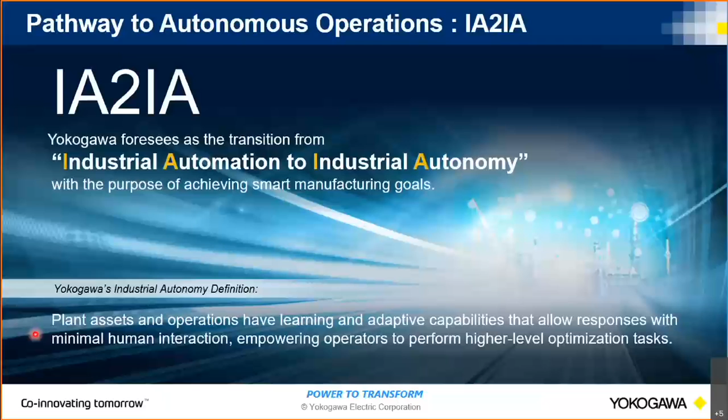As many digital technologies are being developed and released into our market, the process industry is in a big movement from automated operation to autonomous operation.

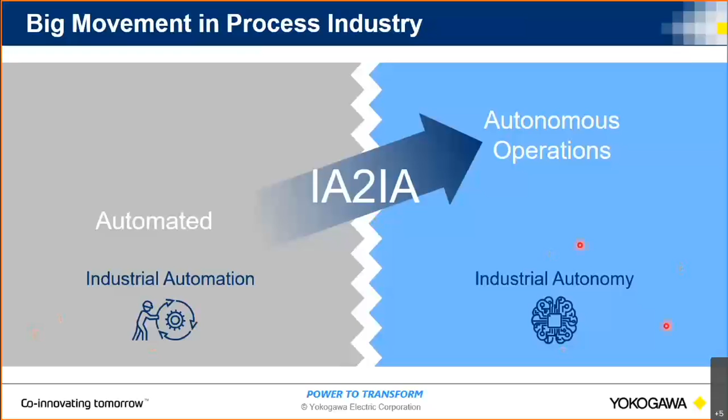Then, what is the difference between automation and autonomy? The picture shows how the automation world is. There are some automated tasks already implemented in your production facility or plant. However, to start or to select what procedures or tasks to be executed over time, the decision is made by human, meaning human intervention between sequences of tasks. So the human starts the automated task. Then once the series of tasks are completed, the human will again come into picture, understand the current situation, then decide the next action.

However, when we transform to the autonomy world, some or all of those decision making currently made by human will be done by the intelligence. That is the difference between automation and autonomy.

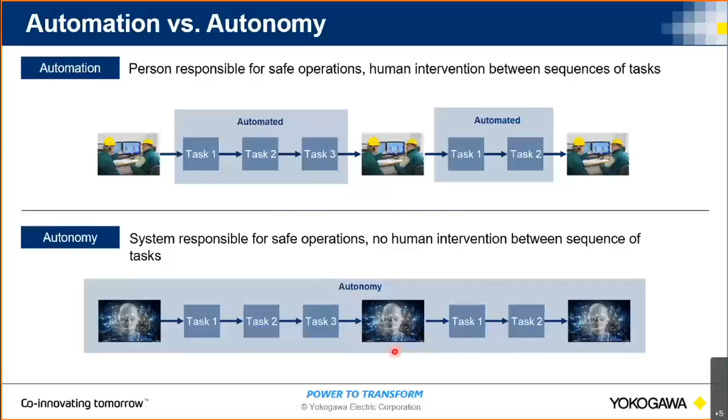And this illustrates Yokogawa today. So Yokogawa has been well known as an automation technology supplier. However, to support our customers' digital transformation better, Yokogawa acquired KBC Advanced Technologies together with Industrial Knowledge and Soteica Visual Mesa in year 2016.

KBC has leading simulation technology for the hydrocarbon industry together with strategic consulting expertise. Industrial Knowledge has secure cloud services which enable supplier and customer secure collaboration. Soteica Visual Mesa has digital energy management and optimization solutions, as well as digital supply chain scheduling and accounting solutions.

By this M&A, Yokogawa's solution portfolio to achieve our customers' digital transformation journey has been extended, and we are continuing to engage with other technology suppliers, for example robotics, etc., to obtain further necessary technologies.

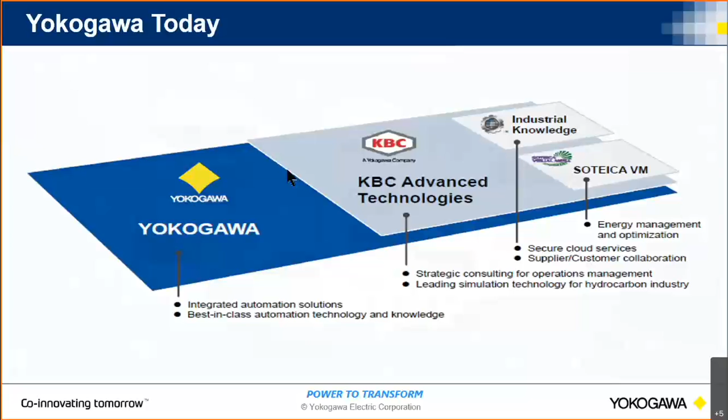In addition to those main drivers, of course, improved human reliability is also key for our industry, because humans are the ones running the plant day by day. In addition to that, the transformation can further address challenges from the changing business environment and optimize the supply chain.

Also, as it is being discussed under SDGs, sustainability and circular economy is getting focused on, not only by industry but also by human ourselves.

Yes, even though there is a driver and a need to bring those digital technologies into our industry, we need to consider new requirements for autonomous operations because we will rely more on those technologies. So higher levels of autonomy need more stringent requirements.

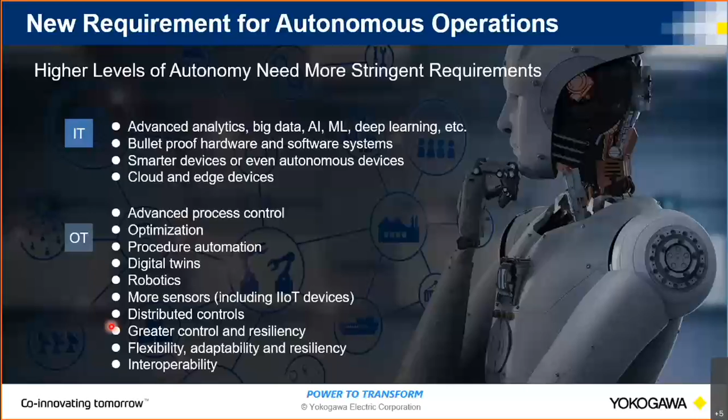We believe the journey doesn't complete by just bringing those digital technologies, but it requires alignment with the company's digital transformation vision and objective. It also requires a change management concept to transform people's mindset, because people are the ones who use those technologies to achieve the transformation.

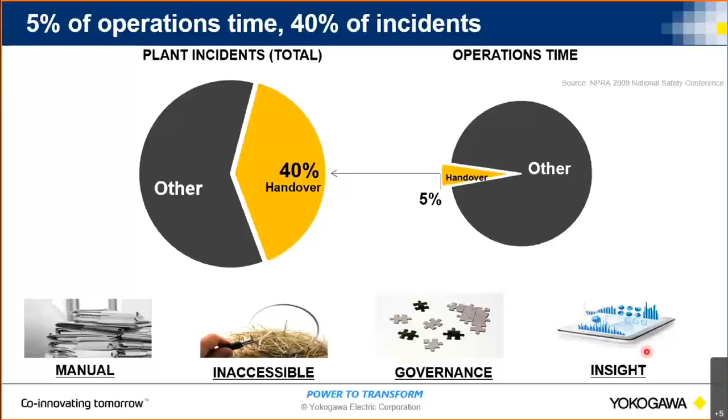That's why we brought this digital shift management solution for your shift groups. When you have a shift team, you have a shift supervisor, operation manager, operator, board operator, field operator. So those multiple roles of people are working in one shift, sharing necessary data at necessary times. However, that data is scattered in many places.

That's why they have challenges having common or correct information at the necessary time. So by digitalizing those shift team activities, we can build a central workplace for the shift team to access whatever data necessary for his operation from this single window. Then, because they are working in a single place, the handover from the outgoing shift team to the incoming shift team will also be smooth, because all the data is integrated into this single place.

And this, of course, appreciates the existing systems. At the enterprise level, you have ERP or document management systems, etc. On the other hand, at the plant shop floor, you have laboratory information management systems, plant historian, handheld inspection. So having this single window together with integration to those existing systems, we can bring all the necessary information into the single window. So this is the digital shift management concept.

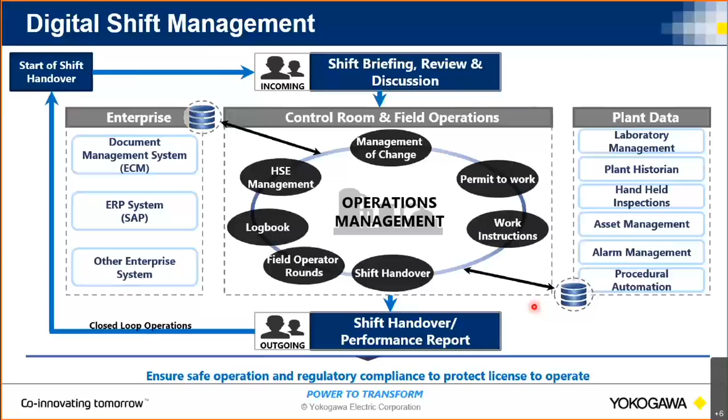To extend further, we also have technology to digitalize field operation. By using tablet devices, ex-certified devices, or smart wearable devices on the helmet, we can digitize field activities as well, so that instead of the field operator recording inspection results on paper and coming back to the control room to transcribe it into an Excel file or other database, this can instantly digitize the data in the field for further utilization. This way, your shift team will be fully digitized and all necessary data can come into a single place.

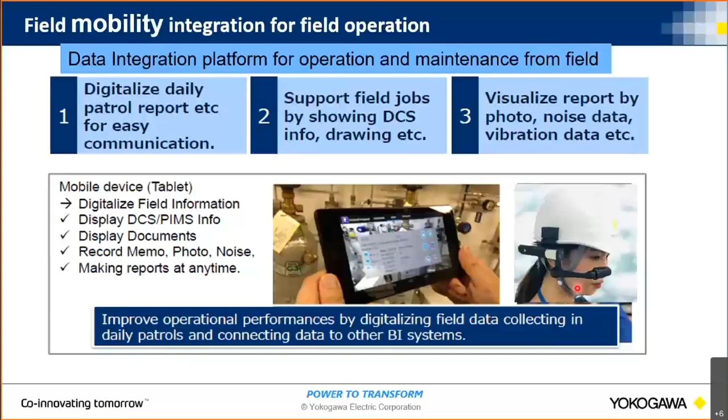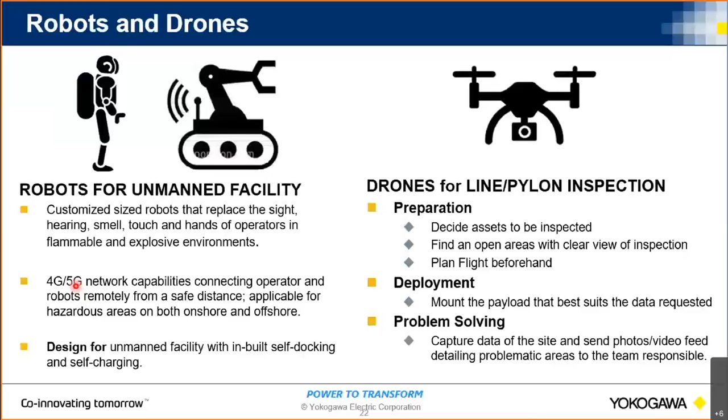The data captured and sent by those robotics technologies can be further utilized for analytics. We can bring artificial intelligence technology into this, so that video or photos of analog gauges in the field can be digitized automatically by AI for image recognition. Then we can record it as a trend and further analyze the trend to get predictions of issues. Drones can also be used for corrosion monitoring of pipelines, also done through image recognition technology.

Seems I'm getting some issues. Am I still audible? Yes, Takashi? Sure, yes. Sorry, my PowerPoint has a problem. My apologies for this issue. There is a technical problem. Let me reopen my presentation. I will come back shortly.

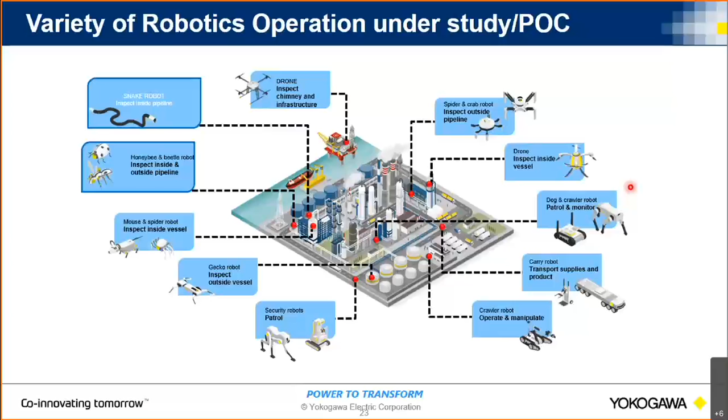Yokogawa has been working with ExRobotics as a robot technology partner, and there is a reference case in the Shell Pernis refinery in the Netherlands. This is the robot technology from ExRobotics, and it has a camera on it, and we can configure multiple sensors on the robot itself.

Sensors are available for H2S gases or hydrocarbon gases, etc. Based on the need, we can configure the robot to mount the necessary sensors as a payload. Then we deploy this robot into the field.

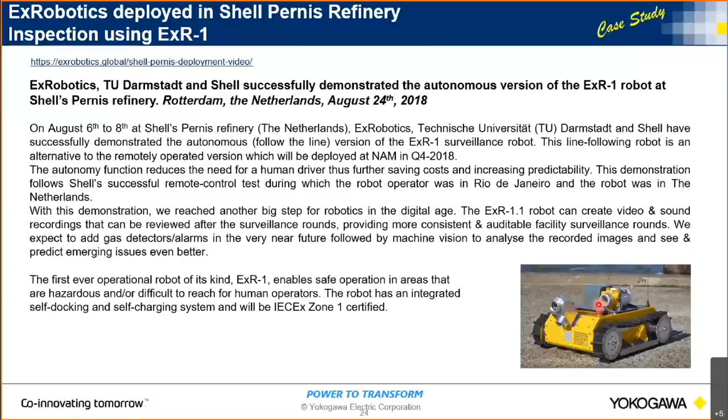One important thing is Yokogawa is not the robot technology supplier, but we are the party to integrate multiple existing robotics technologies into your control systems and industrial automation systems. So we are developing and delivering the middle layer to integrate those multiple robot technologies into your IA systems.

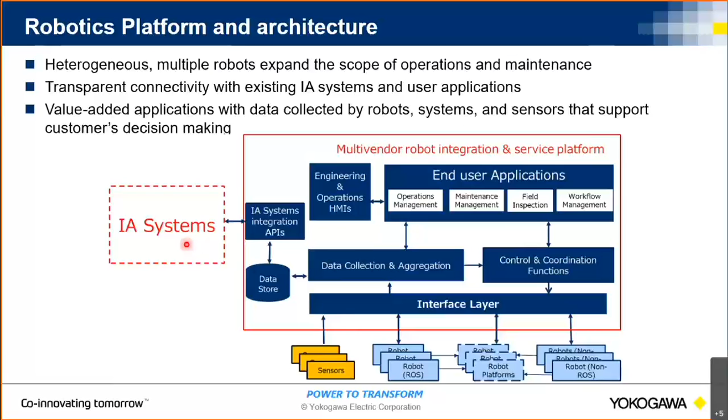The next topic is about the data analytics technology, and a challenge for plant availability improvement.

Currently, plant maintenance is like breakdown maintenance or time-based maintenance. The board operation is a kind of reactive operation based on alarms, relying on individual skills and experiences.

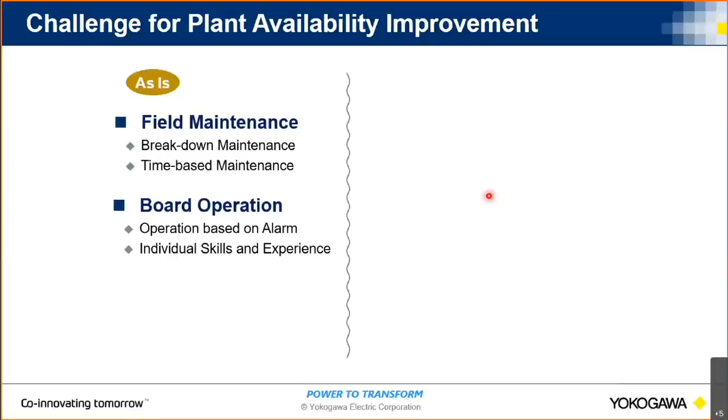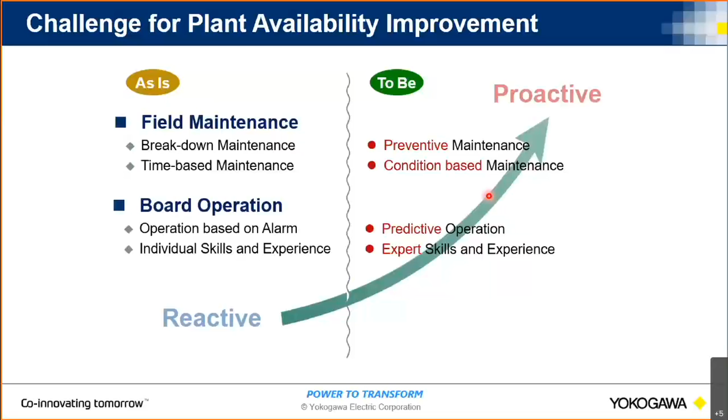However, we want to move this up to proactive ways so that we achieve preventive maintenance or condition-based maintenance. Also, the operation style will change to a predictive type of operation.

Yokogawa has an AI technology to predict the abnormality of our customers' challenges.

The customer has process data, operational data, and process operation knowledge. Yokogawa has data analytics technology and algorithms, and we have a system for measurement and controls. By getting that data, including the IIoT sensor, and combining that knowledge and technology together,

we can develop a machine learning model which generates a health index, so that the model can predict certain issues in advance. Then the plant operation team can run or take corrective or recovery action before the issue happens.

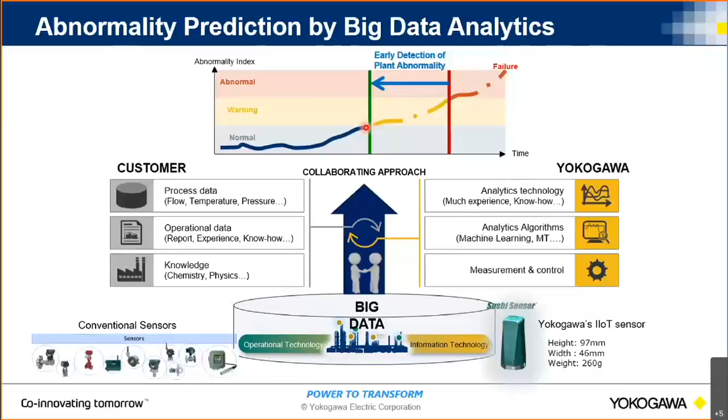Let me briefly introduce how Yokogawa's IIoT sensor looks. We named it the sushi sensor because the size and shape looks like Japanese sushi. This is an example on rotating equipment, where we can mount the sensor very easily, by screw or by magnet.

It uses a LoRaWAN wireless communication protocol, so the data can be easily integrated into a central place. Then we can run the AI algorithm to predict rotating equipment failure.

Of course, we understand your critical, level 1 equipment already has such analytics technology. However, your field operator does inspection rounds to check sound and vibration for the next level of importance rotating equipment as well.

Such activity can be supported by this type of IIoT sensor, together with robot technology, so that we can further digitize and improve efficiency.

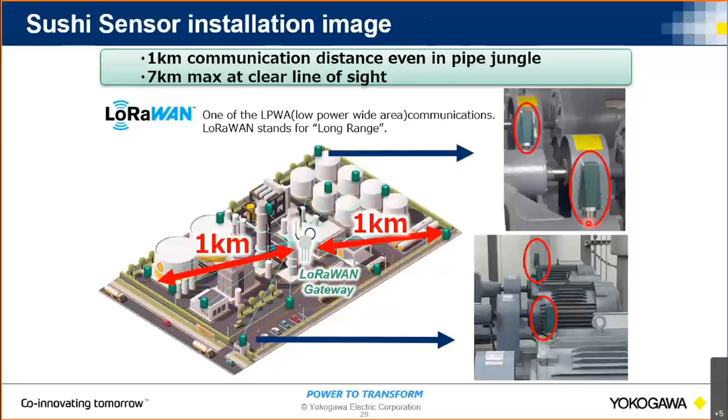On top of AI algorithms, by utilizing modular procedural automation technology, we can prepare the logic or procedure to react to certain situations.

Modular procedural automation technology can help automate certain manual procedures currently executed by your board operator, so that once machine learning predicts a certain condition, we can trigger the corrective action through this procedural automation technology. Then human intervention to recover from such situations can be minimized.

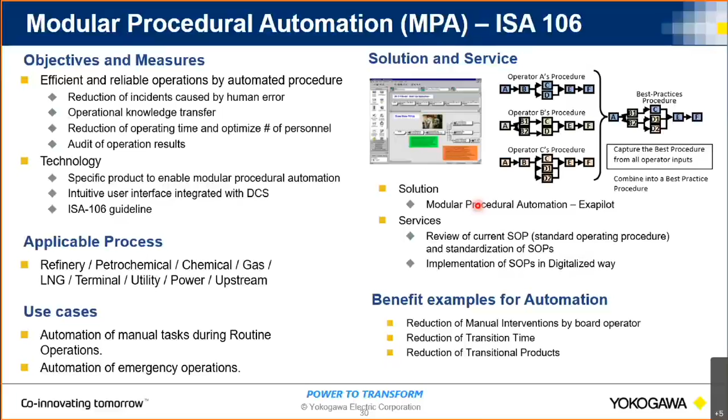Once an issue is predicted, your subject matter experts can utilize the digital twin model to analyze a way to recover from that situation. Or if the issue is not a critical case, we can automatically trigger a modular procedural automation solution, or instruct the cobot, standing for collaboration robot, to take further action in the field.

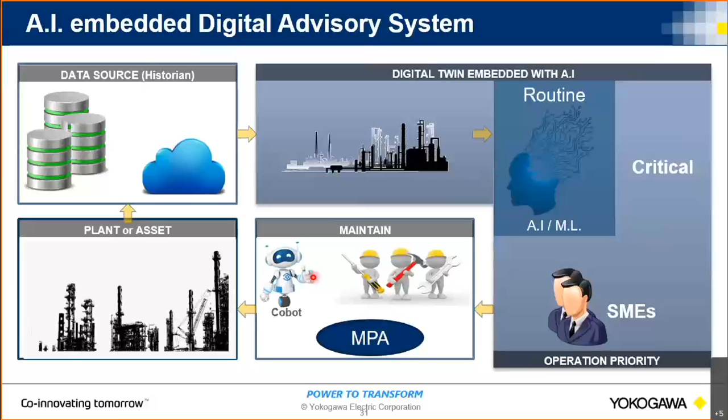Next topic is the virtual reality use case. It talks about asset digital twin.

In the current situation, for your field operator or maintenance technicians to understand your asset situation, there is a physical limitation - he needs to go to the field itself and work there. However, for example, inside the equipment, he cannot see if the equipment is running. But when we build a virtual model of your asset, then such challenges can be addressed.

So what we will do is build a 3D virtual plant that can be operated and monitored. Then we can execute virtual reality training to memorize it as a real experience by operating devices in a virtual space. Then your team can experience, anytime and many times, work or events that cannot be done easily or rarely occur in the actual field.

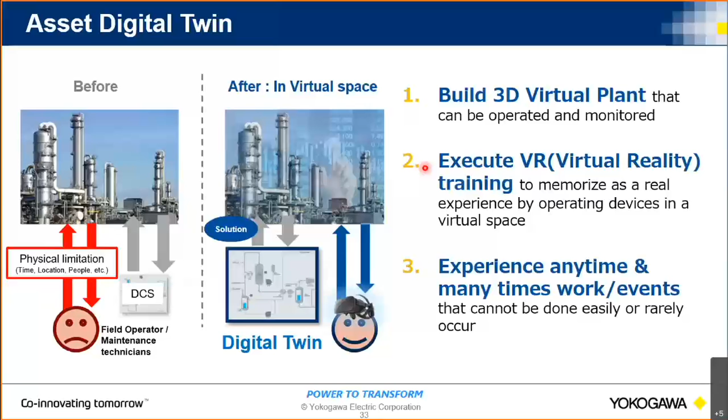Behind that, we have process simulation models so that this manual action can be propagated into the process model. Then other automated equipment or the transmitters will work as in a real process.

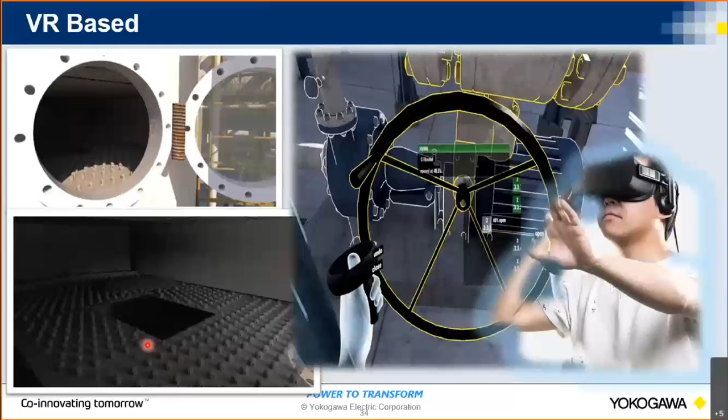This can be further utilized for confined space work training, etc. So once we bring the virtual reality and process simulation modeling technology together, these can be considered applications or use cases for those technologies.

3D digital twin, integration to plant documents, then it can be used as a training tool, which can be integrated into OTS. It can be a repository of plant asset data, with integration to live plant data. We can further integrate such virtual reality models to field data, like maintenance plans, maintenance activities, permit to work, or MOCs. So once you build the asset digital twin model, it can be utilized for multiple use cases or objectives.

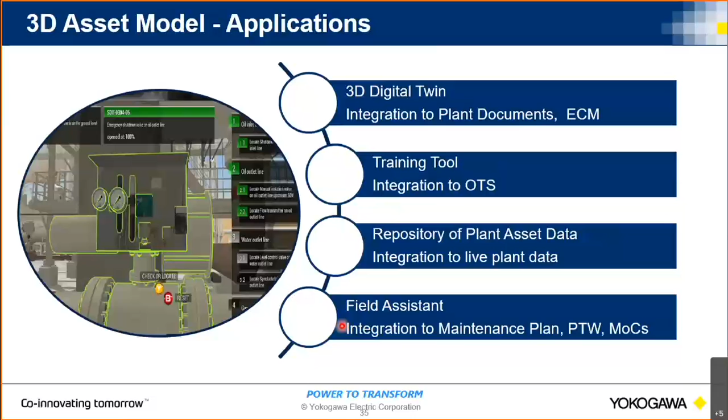This is my last technology use case, enterprise level integration. What is the drive for digitalization? There are multiple different roles and organizations in your enterprise, like maintenance team, operations team, HSE team, technical service team, finance, or management teams, and they all have different activities, objectives, and challenges.

Digital technology can be introduced and adopted for these different purposes. However, at the end, integrating them at the enterprise level is also important, so they can see different data from different sources but in a synchronized and correct way. We call it a single version of truth. By integrating multiple technologies and solutions, they will see different sets of data, but the truth is only one.

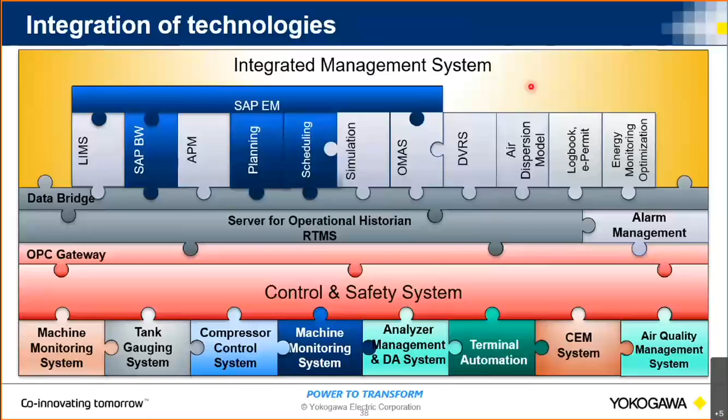So those are the technology use cases of digital transformation - of course, it's not limited to those only. Today I picked up some key technologies which can contribute to digital transformation. However, as I said in the earlier slide, just bringing the technology alone would not work. How Yokogawa supports our customers' digital transformation journey is explained in this section.